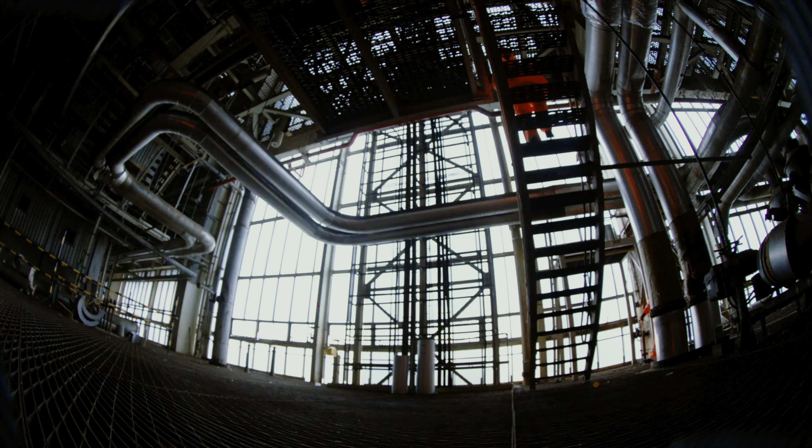So where does our electricity come from? If you were able to shrink yourself down into a tiny little speck and go into an outlet at your home and then fly through the wires, you're going to end up at a place called a power plant, most likely. That's the way our current system is run. We have these large generating stations that are typically far away from populated areas, and they will distribute the electricity far distances, and then we can utilize it in our homes just as we would in our everyday lives. And we're very fortunate to live in a country where we have very reliable electricity. But most of us don't even consider where that actually comes from.

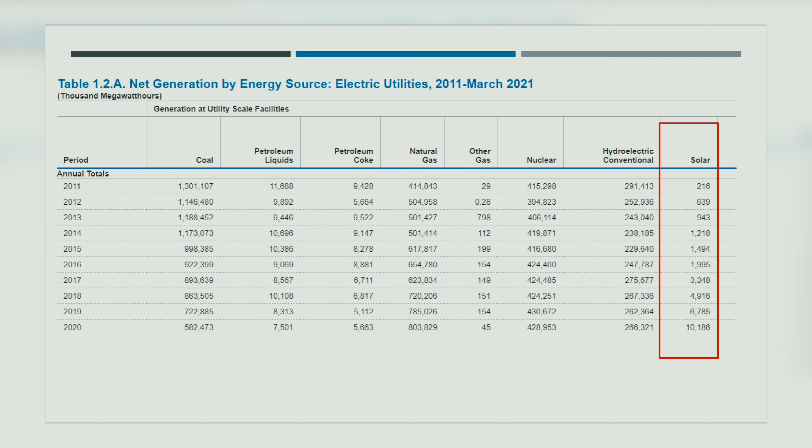So to give a little bit more perspective on that, here are the numbers that go along with that graph. You can see that the amount of coal has decreased at actually more than half, while the amount of natural gas that we utilize and the amount of electricity that we generate from it has almost doubled. And then take a look at the amount of electricity that we produce from solar. It's a very tiny amount, especially in comparison, but over the last decade, it's grown 50 times, which is pretty significant. So we're going to talk about how that came into being and why that is in the next episode.

So some of the incentives, some of the programs that have helped solar grow. Today, we're going to focus a little bit more on the technology, though.

So going back to those types of fuels that we have, let's figure out where they came from, right? So the big ones that we utilize, and in New Jersey our portfolio is kind of extensive, but for the most part, we have about 52% of our electricity comes from nuclear. Around 42% of our electricity is generated from natural gas. And then the remainder, 6%, is broken up about half and half between coal, around 3%, and renewables, around 3%.

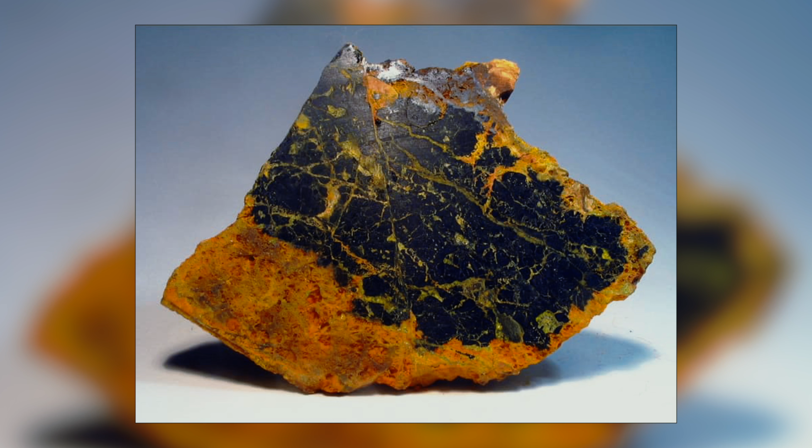So in renewables, they actually have some biofuels, some waste production, as well as solar and a little bit of wind generation as well. So when we look at the types of fuels that generate most of our electricity, uranium, which is the supply for nuclear, coal, and natural gas, that accounts for over 96% of the electrical generation in the state of New Jersey.

And when you look at where those sources come from, they all come from Earth, right? We get them from the ground. Coal is mined from the earth. You have to dig a hole, either create a mine, or in some cases, they actually remove the entire mountain, called mountaintop removal. And then they process that, they place it on a train, they transport it someplace to a power plant, and then we'll talk about what happens next. But same with natural gas.

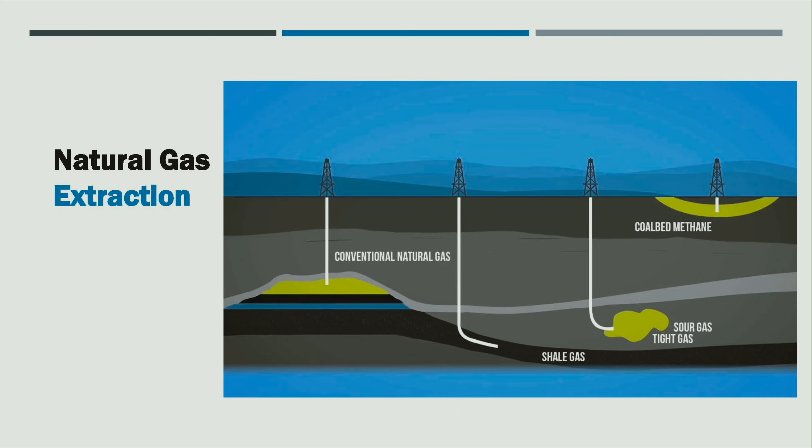They get it from the ground—it is extracted from the earth, placed in a pipeline, and sent and distributed to a place where it can be refined and utilized.

Uranium, also an ore, comes from the earth. You mine it, take it out, and then refine it. There's only one place in the United States where uranium ore straight from the earth can be turned into enriched uranium usable in nuclear power plants located throughout the country. So that transportation has to occur before it even gets to the power plant.

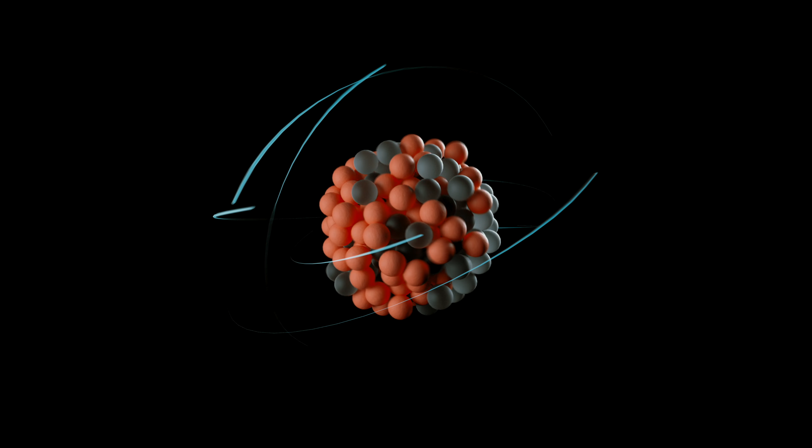Now, once at a power plant, that uranium—which is super energy dense—a pellet about the size of an eraser on a pencil is the equivalent of about 149 gallons of oil, about 17,000 cubic feet of natural gas, or about 1 ton of coal. That's pretty significant, getting that much energy out of such a small piece of material. That's one of the main reasons we like to utilize nuclear—it's so energy dense.

That refined, processed uranium goes into a nuclear power plant, and inside the reactor a chain reaction occurs in which the uranium is bombarded and breaks down. It's an advanced process—nuclear fission—where one big atom is broken apart into smaller ones, and when that happens, a good amount of energy is released.

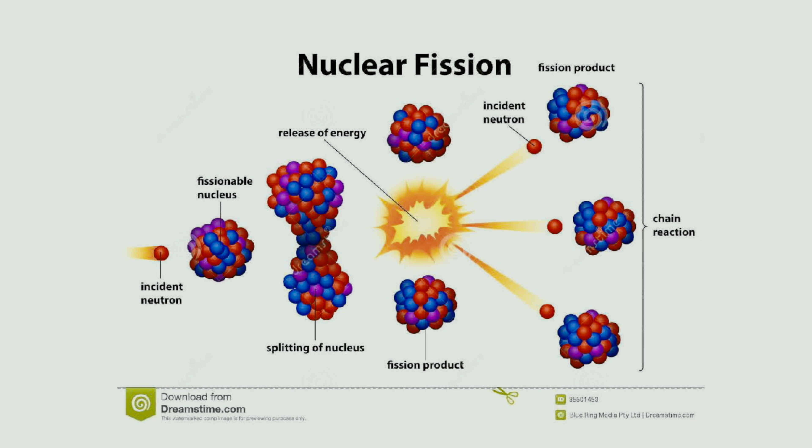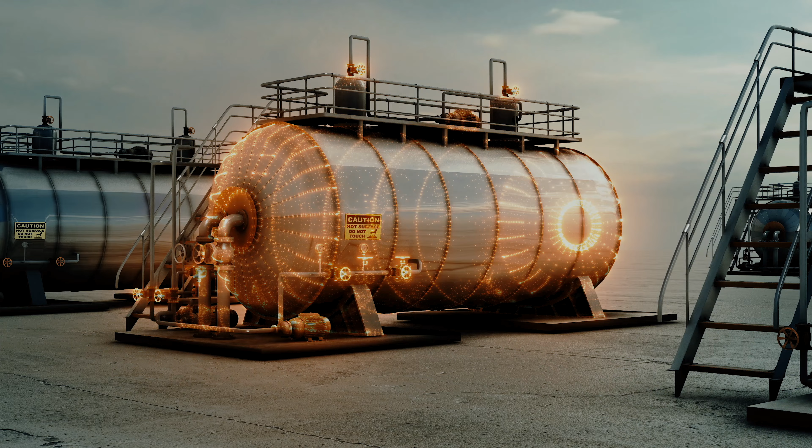We take that energy in the form of heat and use it to heat water. Almost all traditional power plants use that same concept—some source of fuel heats water, and when you heat water, it becomes steam. That steam creates pressure inside a big boiler, and the pressure builds and goes through a system of pipes, and those pipes press the steam on what's called a big turbine.

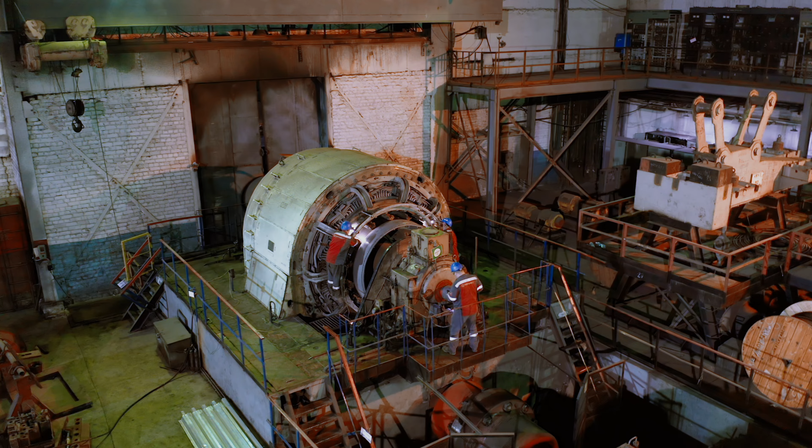The turbine is basically a large, advanced pinwheel. When you apply pressure from a gas, it spins around. In the United States, we spin them pretty quick—3,600 rotations per minute—which gives us the frequency of electricity we like here. On the other end of that turbine is an electrical generator, which is basically a giant electric motor: copper coils inside a magnetic field, and as you spin it around, electricity is created.

So you're taking the nuclear energy from the uranium and transforming it into thermal energy, applying that to water to create steam, creating mechanical energy in the spinning of the turbine and generator, and that becomes electrical energy that we can transform, transmit, and distribute to our homes, where we use it when we plug in our appliances.

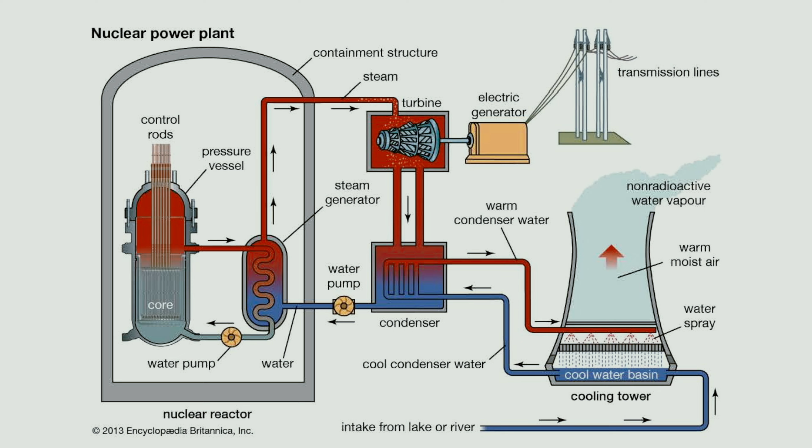So that's nuclear. When we talk about coal, it's pretty much the same process. We take an ore, a rock out of the ground, and refine it in a way that's useful for us. We transport it, typically on long cargo trains, and bring it to a power plant.

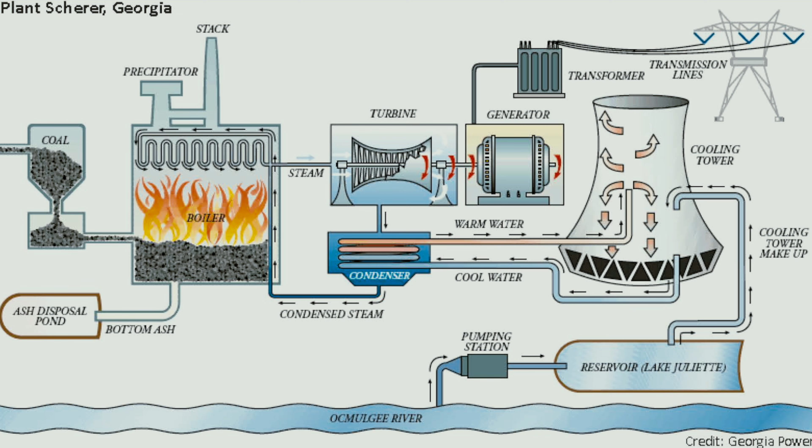It's heated, and that heat is used to boil water. The water turns into steam, which creates pressure. It pushes on a turbine, which spins a generator, and electricity is generated.

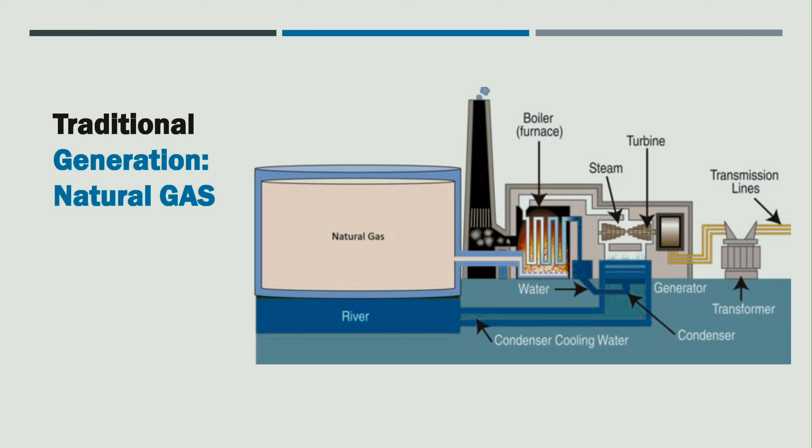Natural gas is the same thing, except instead of pulling an ore out, we pull a gas out, send it through a pipeline, and when it gets to the power plant, it's burned, creates heat, boils water, spins a turbine connected to a generator, and electricity comes out. So that's most of our electricity generated through that amazing physical and chemical process.

Now we have to figure out what's so great about that and what are some of the downsides. It's great because uranium, for example, is super energy dense. Natural gas is fairly easy to get and transport—we don't have to use trains, we can create pipelines, and it's fairly clean burning. But there are some issues with how fossil fuels are used and burned. The downside of nuclear is that it actually creates some nuclear waste.

And that nuclear waste, we don't really know what to do with it at the moment. We're figuring out ways there, and there were some ideas that came up in the past as to how we can take that and transport it to a location far away from a populated area where it might be safe. That plan kind of failed.

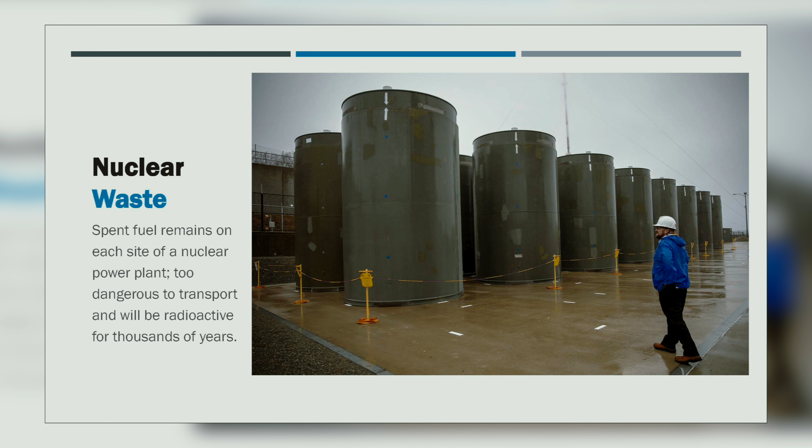So what we're doing now is taking our waste out of the reactors, waste that's still radioactive and will be for thousands of years, and placing it in large silos, large containers on the sites at the nuclear power plants. Right now in America we have 55 nuclear power plants in operation with 93 reactors at those sites, and each site has its own location where they're storing the nuclear waste. We're just kind of crossing our fingers and hoping that nuclear waste is going to be okay and contained.

And if it's not contained, that radioactive material enters into our atmosphere. It's harmful to the entire environment around it for, again, thousands of years. So that's one of the downsides to it.

So far we've been pretty safe. We have had some accidents, Three Mile Island here in America, Chernobyl over in Ukraine, and Fukushima in Japan. But accidents like that happening around the world related to nuclear energy have kind of stopped the US from creating more nuclear power plants, and we're trying to figure out a reliable, safe way that we can ramp that up.

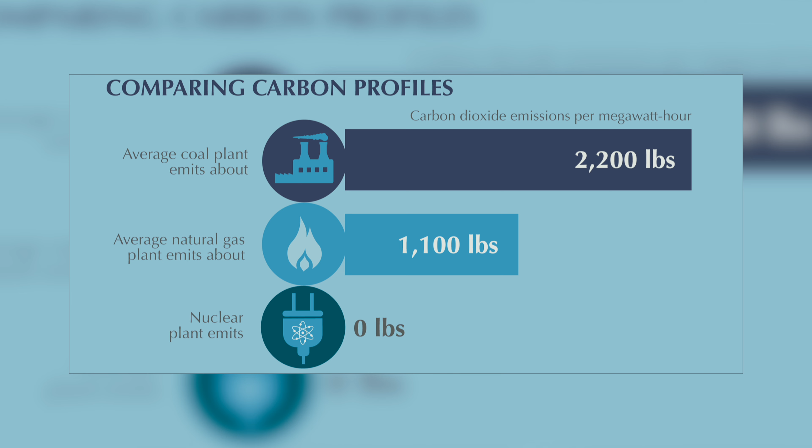Because again, nuclear power does not produce any carbon dioxide, and that's one of the things we're trying to avoid. It actually doesn't produce any emissions into the atmosphere. So if we can figure out a way to handle this nuclear waste better, then that's a really great, viable option to create a more sustainable future.

Coal, on the other hand, when you burn it, you're not only emitting carbon dioxide, but a lot of other pollutants that directly impact the environment around it, as well as the environment as a whole. Things like mercury, chromium, these heavy metals, are actually entering into the atmosphere, getting into people's bodies, and causing serious health concerns.

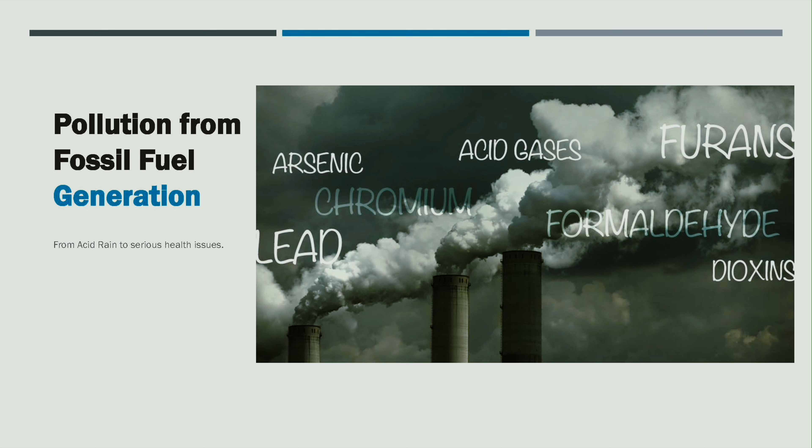That's one of the main reasons why we've actually shut down a lot of coal plants and ramped up the production of natural gas plants around the US. Because when you burn natural gas, you're not getting the same kind of emissions and heavy metals that come from coal. However, natural gas does emit carbon dioxide, and when we're burning that we're creating more greenhouse gas and a greater greenhouse effect, which impacts our climate. So we do want to transition away from that as well, as much as we possibly can.

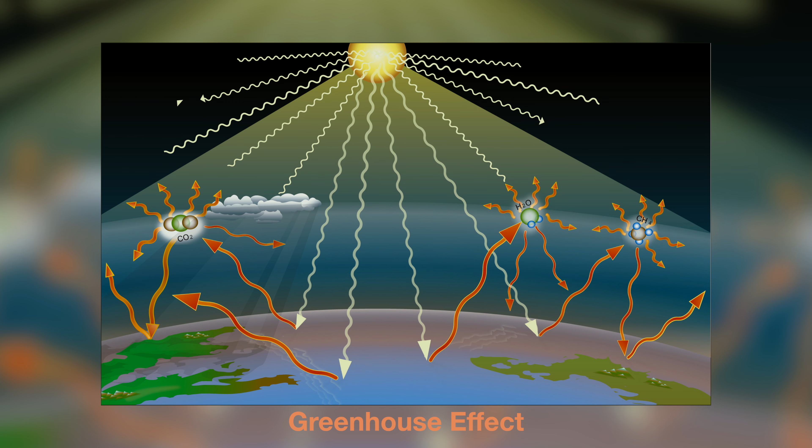So what are we transitioning to? Well, we have a lot of different alternatives. The first, not necessarily the oldest, but one we've used and relied on pretty consistently since the beginning of generating electricity, is hydroelectric. It's a pretty efficient and substantial way to generate electricity.

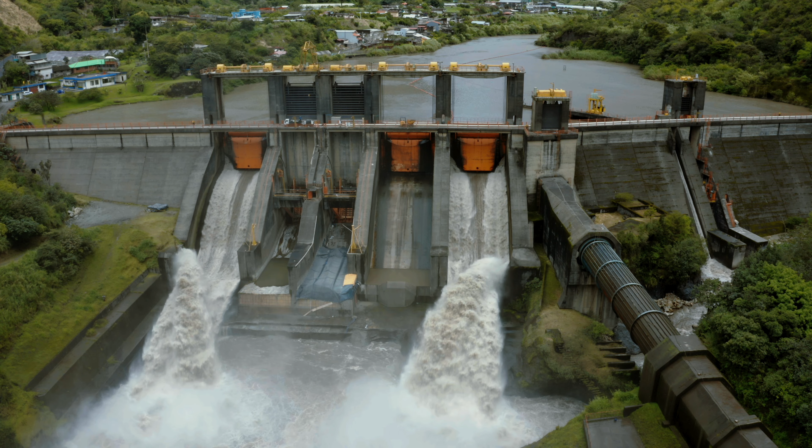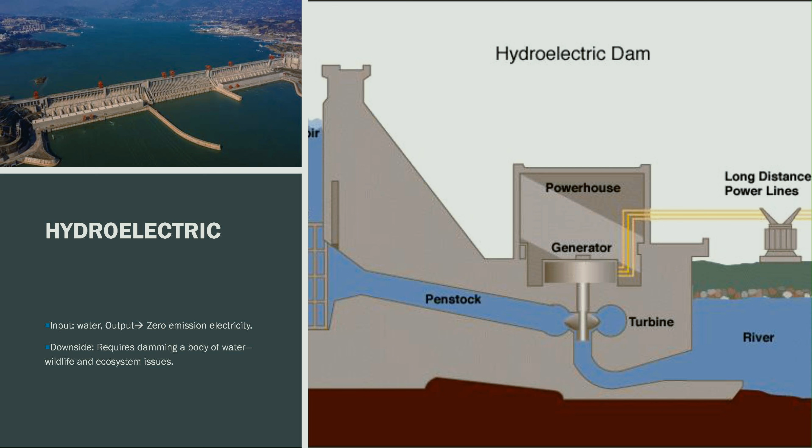It's pretty straightforward too. You essentially just place your turbine that spins around, but instead of pushing steam on it, instead of boiling any water, you take the natural flow of a river, and that current and force will push on a turbine, which is connected to a generator that creates electricity and distributes it out to the grid for us to utilize.

No pollution is created in the process. You're not burning anything, so there's no emissions going up, and there's actually no waste material either, like with nuclear. You don't have that issue.

So one of the issues with hydroelectric is, first of all, there's not always a place where you can put it, because you need to have a source in order to actually utilize it. The other issue is that even if you do have a source, you have to dam that river, and by damming it you're going to create some sort of flood zone behind it, which might displace some people, some animals, and create an environment that may not be the most eco-friendly as a result.

So we transition to things that we can utilize in multiple areas that rely on more renewable resources, such as wind.

Wind turbines have been around for a very long time. We've used windmills for thousands of years, and that idea of taking wind energy and utilizing it as a source of motion has been around for thousands of years in the form of sails. We use wind energy to spin a turbine, which is just a really long airplane blade or wing. As it spins, it's connected to a generator through a gearbox, and that generator spins at 3,600 RPMs, generating electricity that we can distribute to our grid.

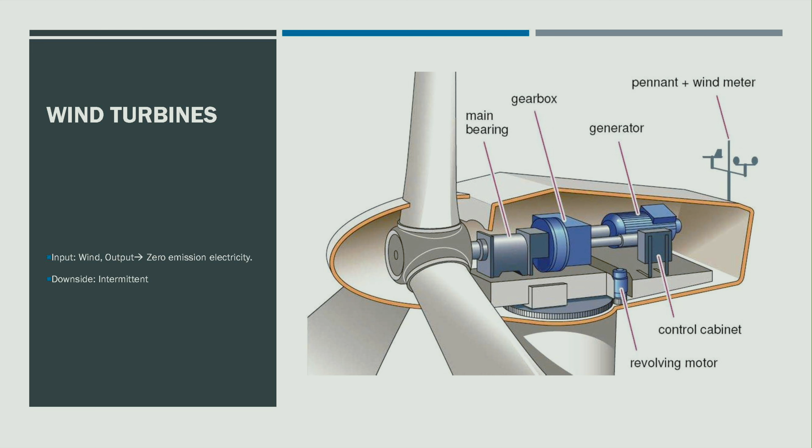Pretty straightforward. Of course, the problem is the wind is not always blowing. Once you have that diminished capacity of airflow, you're not going to be able to spin those generators. You won't have the electricity that we rely on as a reliable source of our energy needs these days. The major fuels, coal, natural gas, uranium, as we spoke about, are mined and taken from the earth.

So they are natural resources that are actually not renewable. The earth is not replenishing them at the same rate at which we're using them. At some point in time, and it varies depending on where you look and what kind of internet research you can or can't do, because it's all over the place, it varies as to how much time we have left given the rate we're pulling it out. Regardless of how much time is left, it's a resource that will eventually run out, and so we need to transition away from that.

We need to find something that's renewable, something that is not going to come to an end. We'll talk about some of the options we have in just a minute, but I wanted to point that out because that's one of the major downsides of using fuels like uranium, coal, and natural gas. The other issues we have with those fuels are that the fossil fuels, coal and natural gas, actually emit pollutants and carbon dioxide.

Carbon dioxide is not a pollutant, but it is a greenhouse gas. A greenhouse gas enters the atmosphere, and some of the light and energy from the sun that should have been reflected back into outer space is actually trapped on our Earth, causing the Earth's climate to change and causing issues around the globe that we've experienced in the last couple of years. We have more severe, more prevalent storms, and we want to change that. We want to make sure we're trying to avoid emitting as much carbon dioxide as we currently are, so we're transitioning away from that as much as we possibly can.

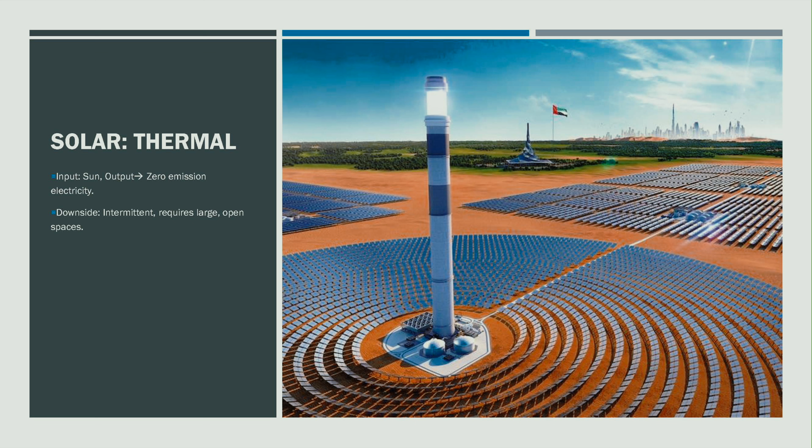Inside that tower you have a heating chamber with some sort of liquid, some type of oil, and as it's heated by that concentrated energy of the sun — think about taking a magnifying glass and almost starting a fire with it — you're taking that energy from the sun and concentrating it into one particular point. It gets superheated, and then it goes through the traditional generation process where that heat boils water, creates steam, and spins a turbine connected to a generator that goes out to the grid.

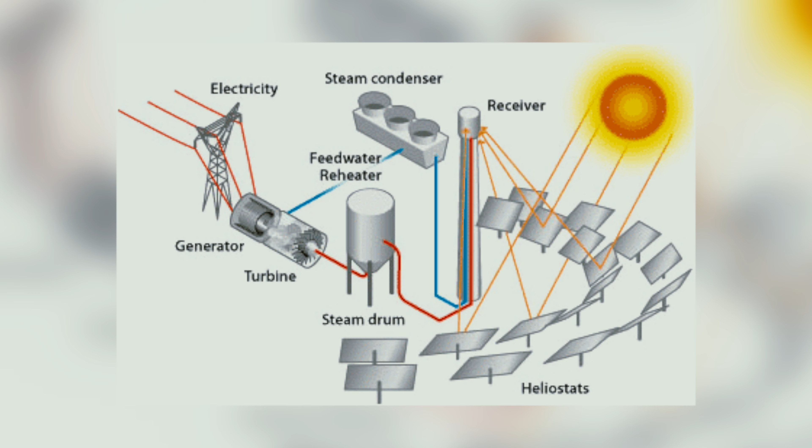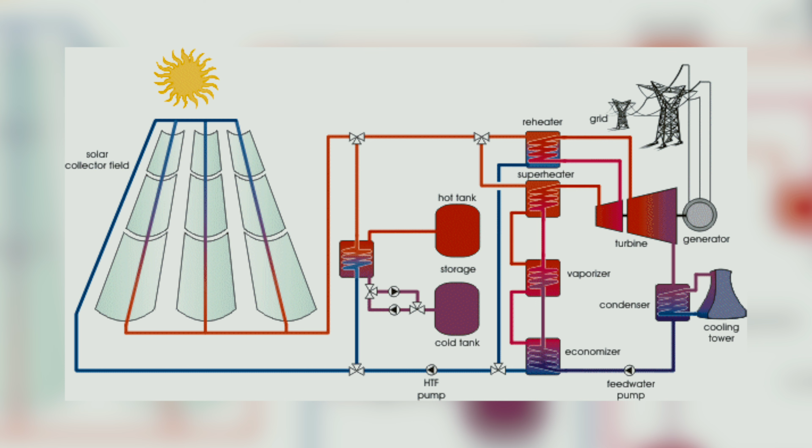The other option for solar thermal is to create a trough, and within that trough you have a tube filled with the same or similar oil, and the light from that trough is concentrated onto that one focal point where the tube is. As the oil travels through the tube, all the light is concentrated onto it, so it gets superheated, goes into water, creates steam, spins a turbine, and generates electricity — all the same end processes you'd have with a typical generating plant like nuclear, coal, or natural gas.

However, now the only input is sunlight, which you don't get from the Earth. It's not mined. It's a nice renewable resource with zero pollution. The other type of solar technology is called photovoltaic, which literally means light electricity. You're taking photons from the sun and transforming them via solar panel into electricity. That's pretty amazing, because unlike anything we've talked about before, there are no moving parts.

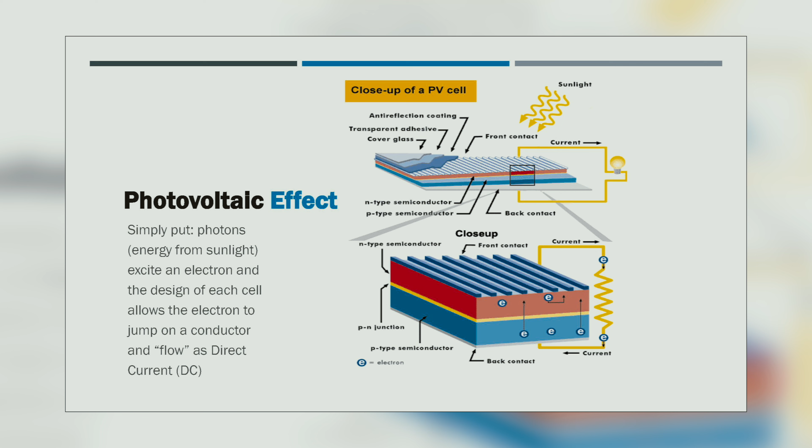The only input is sunlight. The material inside the solar panel is typically made out of silicon. Silicon does come from the Earth, taken from the Earth's crust, but it's also the second most abundant element in the Earth's crust.

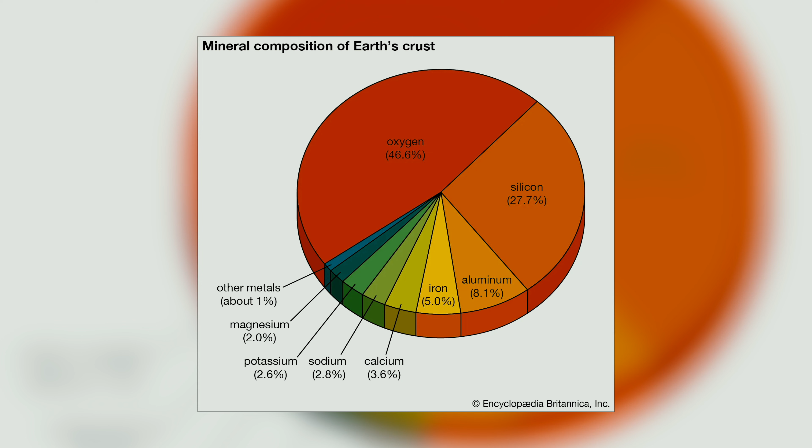When you take that silicon and refine it, you create these silicon wafers that are super thin, so you're not using a lot of it for each solar cell. You place them into an array, and then you leave that array in place - you no longer have to keep throwing silicon onto it, just like you do with coal or uranium or natural gas, where you have to continuously add fuel to the fire.

Those panels that we use are warranted by the manufacturer to produce electricity for 25 years, and most of them are still producing after 50. It's pretty impressive that this form of electricity has no moving parts, no required inputs from the environment other than sunlight, and it just sits there and generates electricity for us with zero emissions.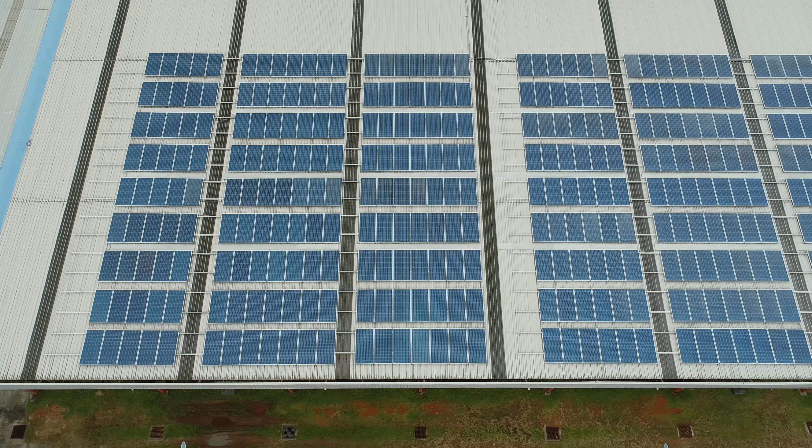Photovoltaic is really cool, and we talked about wind, which we all know about, and probably hydroelectric too. But there's one more technology we might see growing into a bigger industry - that's called a fuel cell. Fuel cells have actually also been around for a long time, but there's a lot more input and economic stimulus going behind this technology and its implementation. So I'm going to take a couple minutes to talk about it, because it's pretty awesome.

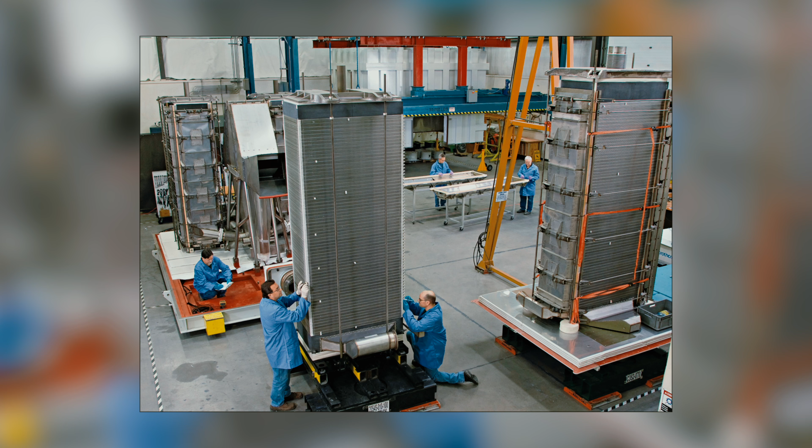This is a technology similar to photovoltaic in that there are no moving parts and no waste, no emissions. The only input you need is hydrogen. Similar to silicon being the second most abundant element in the Earth's crust, hydrogen is actually the most abundant element in the entire universe. So that's saying something - we basically have a lot of it.

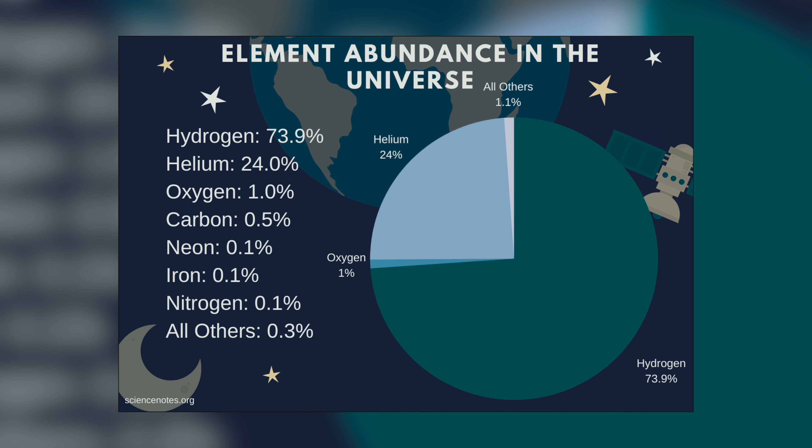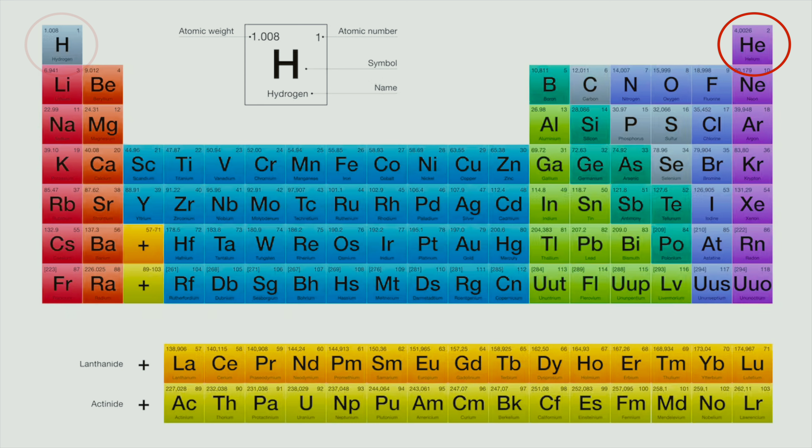The problem is that hydrogen is the lightest element. You're probably familiar with helium, the second lightest - if you have a balloon filled with helium, it'll go straight up. If you had a balloon full of hydrogen, it will also go straight up, but it won't stop - it will actually exit the atmosphere. That's how much less dense it is than everything around us. So capturing it and storing it has become a bit of an issue.

But we have plenty of it. It's locked in our hydrocarbons, and it's locked up in this other great thing called H2O. We can tap into those resources, pull the hydrogen out, and place it into a fuel cell. The fuel cell will combine that hydrogen with oxygen, and when you do that, you actually create electricity using a fuel cell membrane inside of it. And that's pretty awesome because you also create water - so the only output from this source of electricity is H2O.

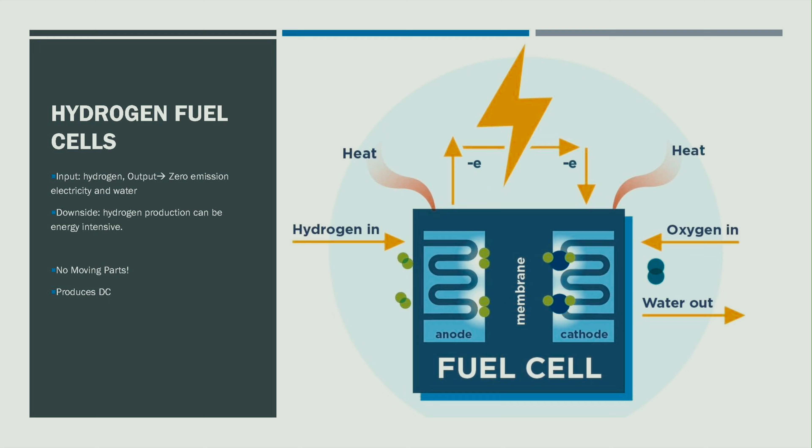So I'll repeat that: you take H2, the most abundant element in the universe, which you can get from water or from hydrocarbons, and place it in a fuel cell, combining it with oxygen from the atmosphere. Electricity and water will come out of that. That's pretty amazing, and I think we're going to see a lot more of that in the future.

In the next episode, we're going to explore the timeline of policies and all of the other events that brought New Jersey into the forefront of the solar industry. We're going to see exactly what kind of policies and legislation are in place right now that are leading to growth and a greater workforce and economic development within this particular field.